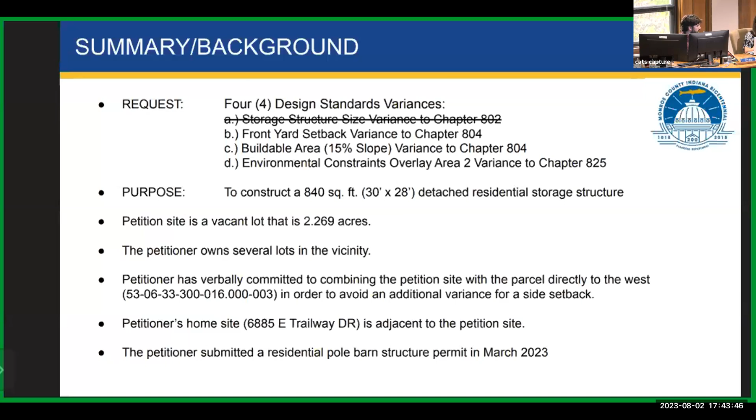This is also in the packet, in order to avoid an additional variance request for a side yard setback. When we get to the site plans from the petitioner, we will show you exactly what we mean by that, and show more detail about where the structure will actually be located.

The petitioner submitted a residential pole barn structure permit in March. After review of that and communications with staff, it was determined that the variances on the docket for tonight would be necessary.

This petition was heard at the June 7th, 2023 BZA meeting. The BZA voted to continue this petition based upon new information submitted by the petitioner during the meeting—that the petitioner was planning to reduce the structure's size.

Originally, we had another variance request within this petition about the storage structure size. There is a limit of 875 square feet in this zoning district for a storage structure placed on a property that does not have a principal use structure on it, sometimes referred to as a residence. Since this property is vacant, they would have needed that variance request. But they've reduced the size to 840 square feet, which simply removes that request.

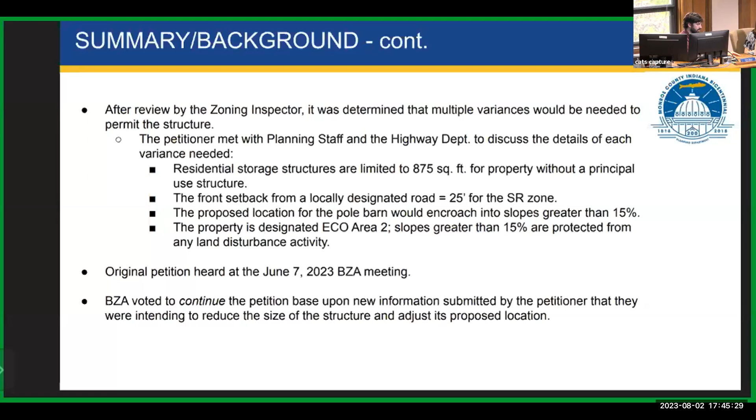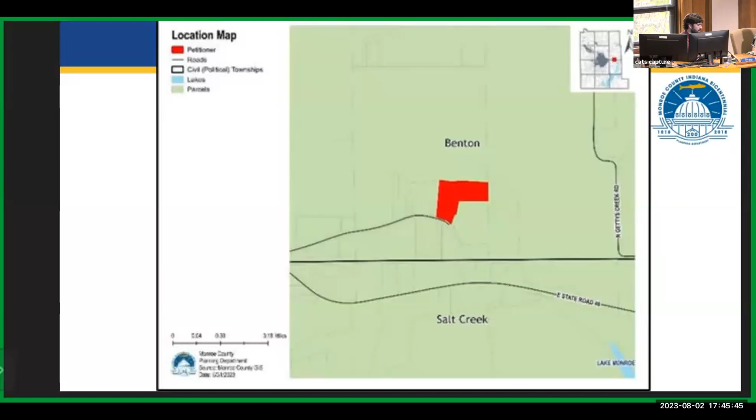Here we have the location map. It's on 6885 East Trailway Drive. That address is the petitioner's address. This subject parcel is two parcels to the east along East Trailway.

Here we have the site condition map. The green lettering shows the parcels I've just mentioned. The petitioner's parcel is on the left side of the screen, and the petition site is on the right side. There is a parcel in between, also owned by the petitioner, that they intend to combine in order to avoid a side yard setback.

As you'll note on this map, the buildable area—all the area not color coded in red—is very limited. All the areas in red are over 15% slope. So the petitioner has requested the front yard setback, as well as buildable area setback variances, in order to find a location that disturbs the least amount of land while still meeting their needs for the storage structure.

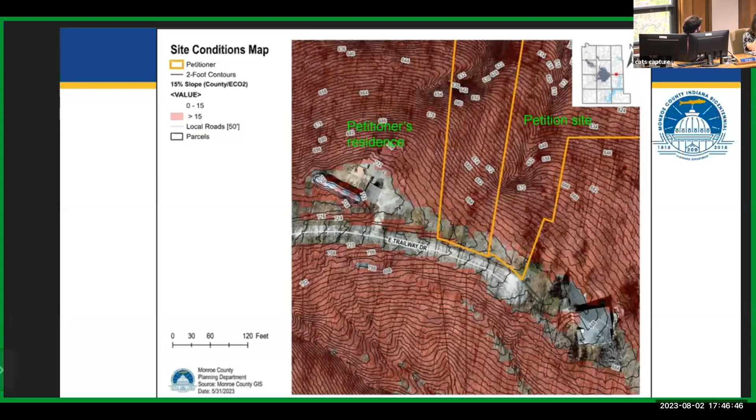And that one there is just aerial pictometry of the site. We'll come back to it if need be.

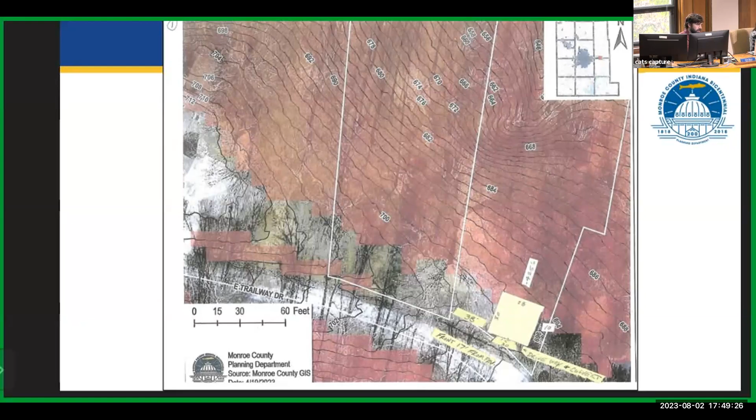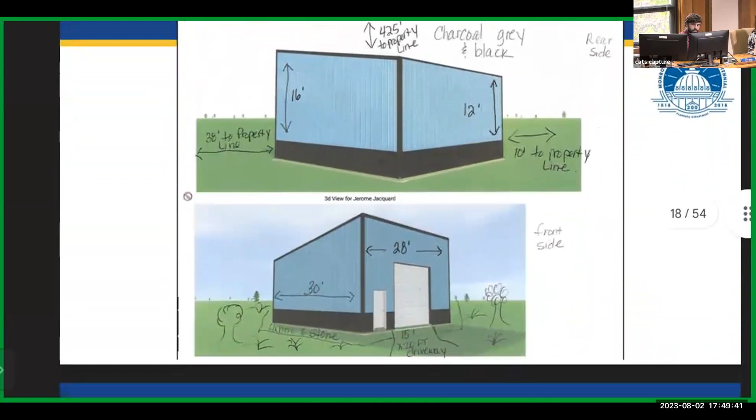Here is a diagram of the proposed structure submitted by the petitioner, along with some measurements, and an additional page of writing from the petitioner that was included with that drawing. This is all included in the packet, so it's probably easiest to see it there.

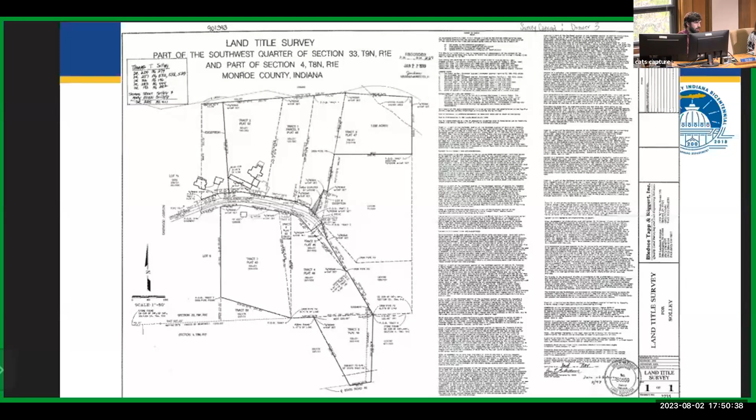Here is a survey of the area that was submitted to staff. It provides information regarding East Trailway Drive in this area, as well as a number of covenants and restrictions for lots in this area. Planning staff does not enforce covenants and restrictions from subdivision plats—those are enforced by an HOA or through civil suit by property owners. So although there may be some constraints outlined in those covenants and restrictions, the zoning ordinance does not have authority over them.

And this is just a zoomed in version of that, to get a better idea of the sites we're talking about.

And here are some images of those covenants and restrictions I spoke of. We can come back to review those if needed.

And here we have some pictures submitted by the petitioner of the location of the driveway they want to install for this structure.

We do have one letter of support that was submitted. We had this at the last meeting. I don't believe it was included in the packet because it came in a little late, but it was in the PowerPoint—so we do have at least one letter of support. It was included in the packet, so we can come back to it if needed.

We also have some letters of opposition, primarily from one individual, the property owner to the south, who submitted a letter of opposition and also retained the assistance of the Carmen Parker law firm to produce a letter of opposition, as well as Abram Moss to produce a letter of opposition with respect to the site's physical constraints. That's also included in the PowerPoint and the packet.

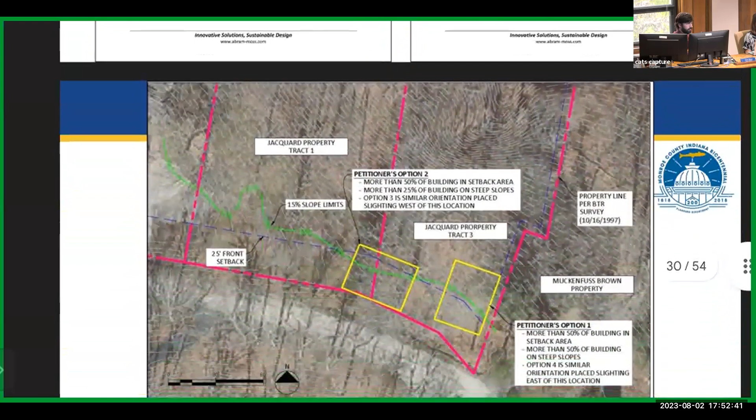This image here was included in the original letter of opposition from Abram-Moss. However, the storage structure size has been reduced, so this item is not completely accurate, although the outlining of the parcel lines and the slope area does remain.

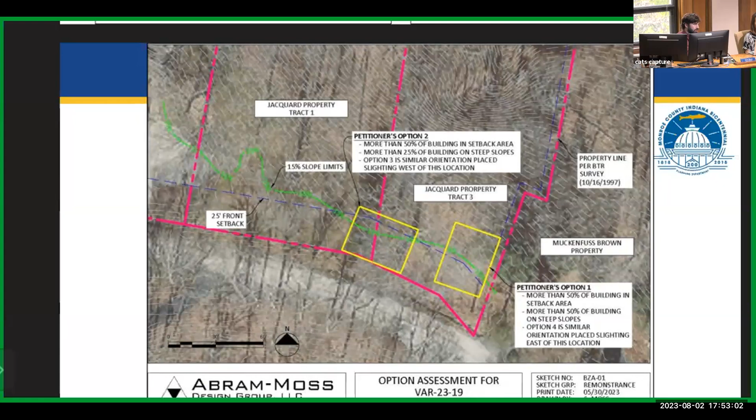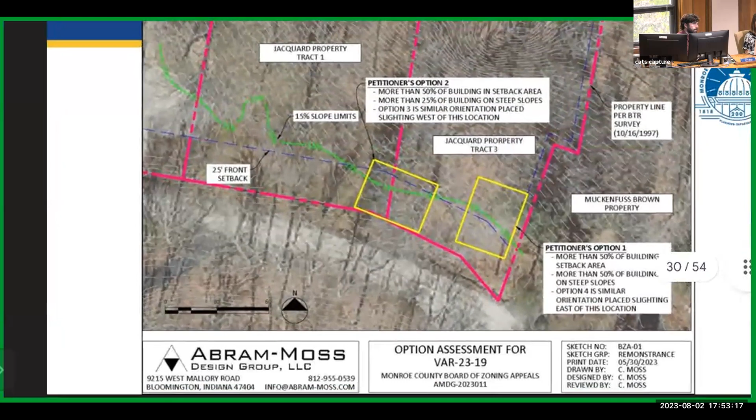Could we go back to that last one? Is the green line the 15% slope? I think so, because it doesn't have it in red. So it's a change in presentation. I want to make sure I understand it. And that's the green line. Thank you, yes, just wanted to make sure.

Those yellow rectangles were some proposed locations for the storage structure at the last variance hearing. However, it's reduced in size, so those yellow rectangles are not representative of what's being requested today. But what is being requested today still...

...goes above the green line. Yes, it does still encroach slightly into the 15% area. Thank you.

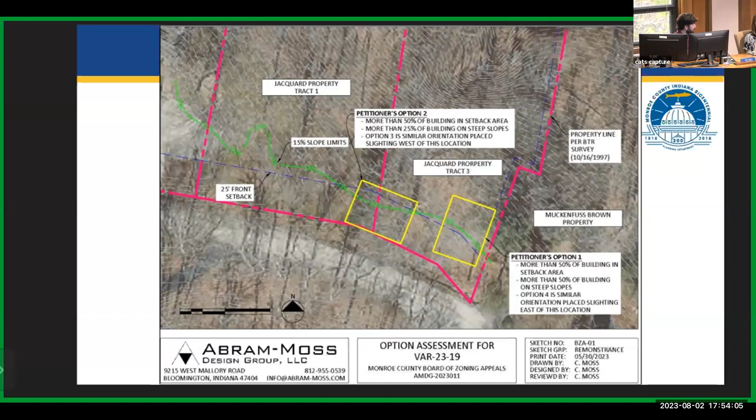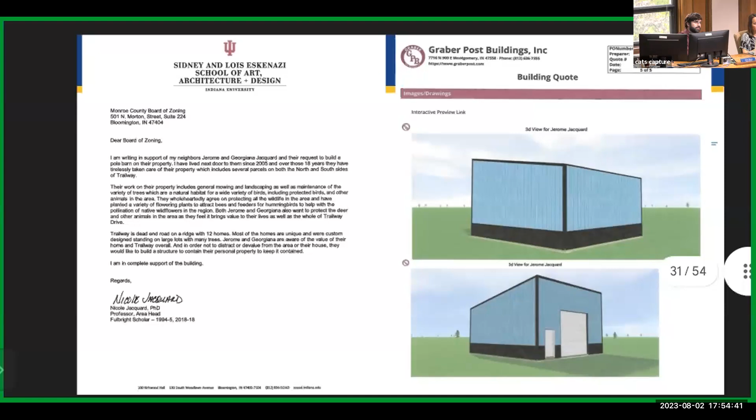Okay, so that brings us to the staff's recommendation. As stated, the first variance, VAR 2319A, was withdrawn because it is no longer applicable. The petitioner has reduced the storage structure size to meet the requirement of 875 square feet.

VAR 23-19B, the front yard setback variance, chapter 804, staff does recommend approval of that variance request with one condition: that a surveyor stake the front property line so that staff can confirm that the location of the structure will indeed be on the property and not encroach into right of way or anything like that.

And then VAR 2319C and D, which are the buildable area, 15% slopes, chapter 804, and the eco area 2, chapter 825, staff recommends denial of both of those items, primarily citing practical difficulties are not met in that the structure could be further reduced to eliminate the buildable area encroachment. I'll now take any questions.

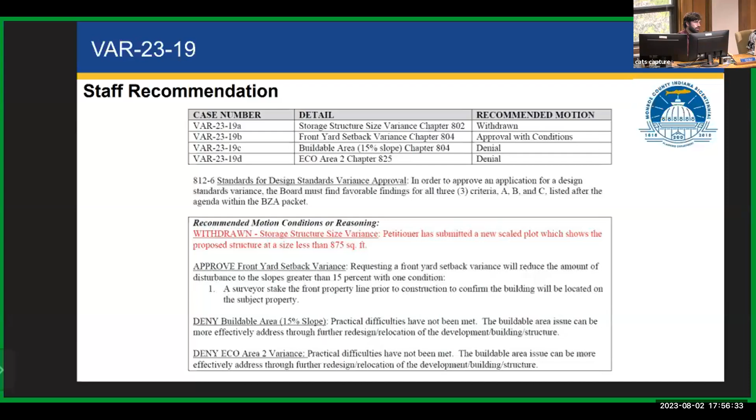That's a good question. I did not perform an analysis to see what the exact square footage would be needed. If we go back to the petitioner's site plan, you can see that it just slightly encroaches. It's a few slides up. Thank you.

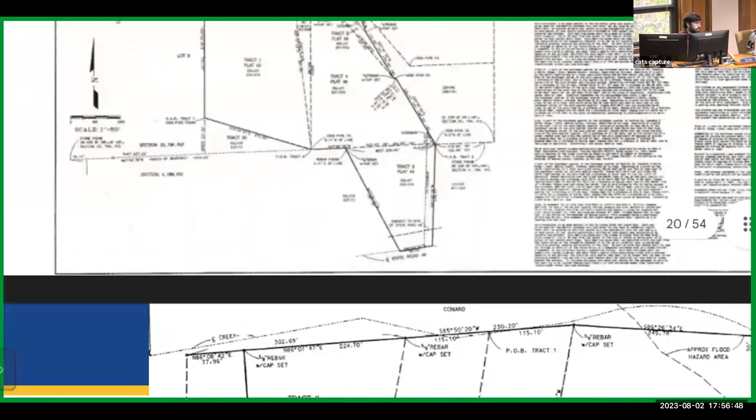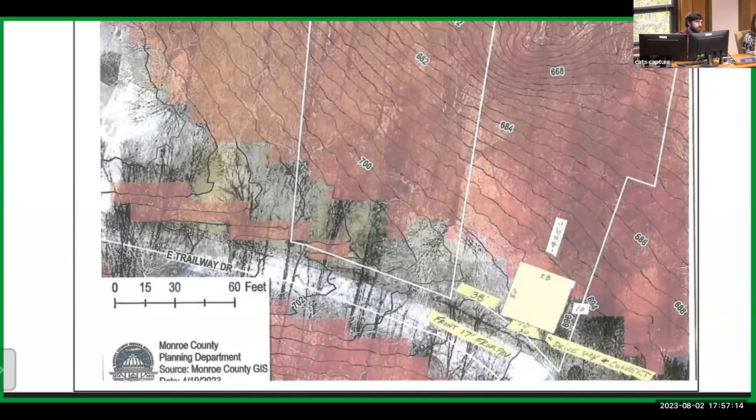Right there, so you can see the rectangle in the bottom right-hand corner. There's still a sizable area that would encroach into the slopes. And with that, the petitioner certainly has their reasoning for a certain size of the structure. It's just with the strict application of the zoning ordinance, theoretically, a structure could be reduced in size and meet buildable area in the area.

Okay, yeah, it could be, but it would be reduced so small that it wouldn't be worthwhile. I also note that in the letter from the attorney of the person who is against it, it points out that the warranty deed says there's no such thing as, they're not allowed to have storage facilities according to the deed. But it's got a garage door and a service door, so that means it's a garage. That's not a storage facility. So I don't know if we're calling it a storage facility, but it's actually just a garage, as far as I can tell. And it looks like they've tried to design it such that it fits exactly with the design of the house and the area.

So understanding that, you have to tell us that there's a 15% slope problem in the ECO 2 area.

It's not an egregious issue in my book, but I'll talk about that later. Thank you.

Any other? I would just... Can you hear me okay? Okay, yes. I'd just like to address two items.

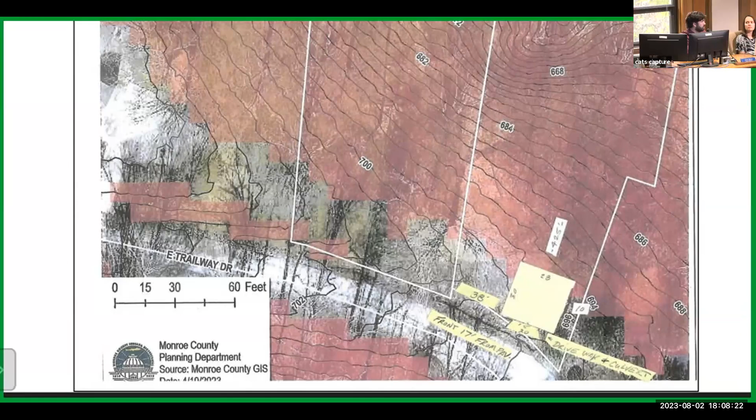My follow-up question: I see all the red behind that to the north. 15 degrees—it's 15 or more. Are we talking 15 to 18 degrees for that first 10 feet? Is that fair? Sean, will you scroll up to the slope map itself, which has the actual percentages listed? It just shows as greater than 15% here. Right, that's what I was saying earlier. To your recollection, after a site visit, this was not a 25 or 30 degree slope—it's fairly gradual. Okay, thanks, I'll say that.

Are there any other questions of staff from board members? No, not me.

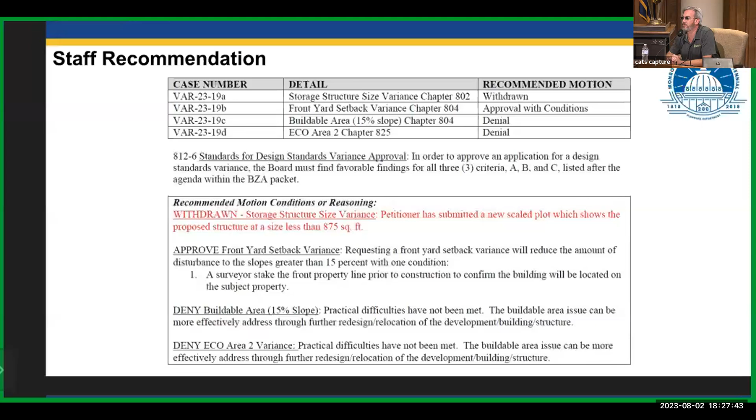Are there any other questions of staff at this time? Are there any other remonstrators who wish to speak that are inside the room? We're going to follow the same process—step forward, make sure the mic is there, sign yourself in, and we'll get you sworn in. Thanks.

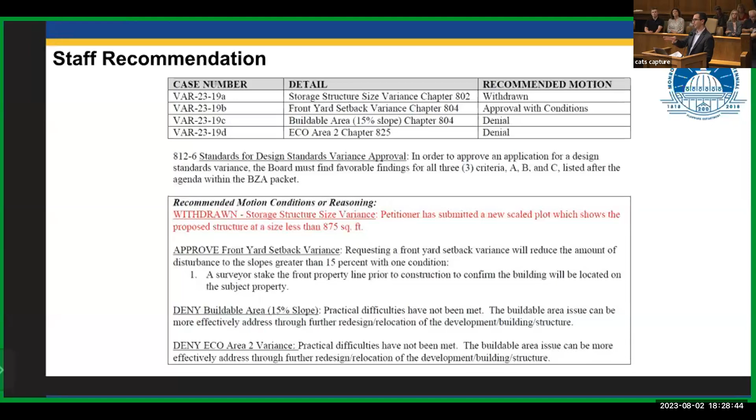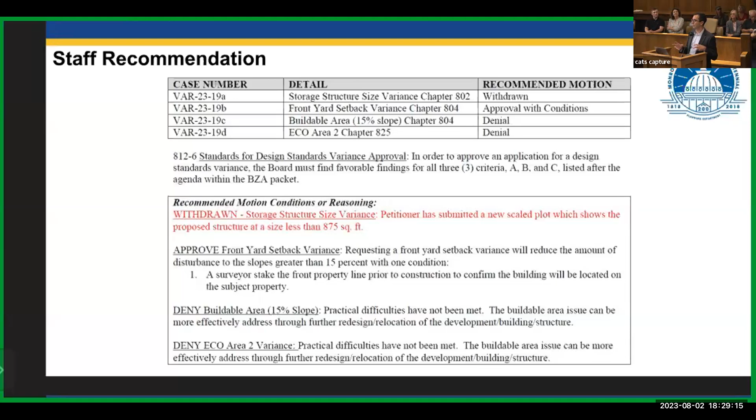For purposes of this, I just wanted to focus on the findings of fact, and for a design standards variance, this would be injurious to a natural area. It's obviously a steep slope, ECO 2 zone. If you could please turn to slide 11, that's one of the slides to look at, but I'll keep talking. This is a very small natural environment and the slope is very steep.

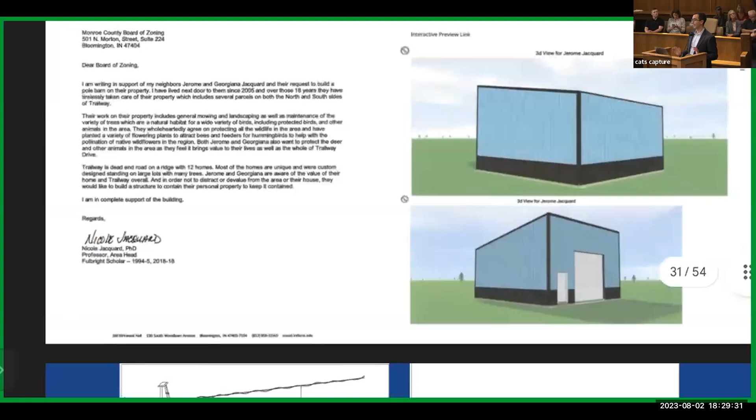There's been no showing as to why it has to go right next to my client's property. It's something the property owners have exchanged words about for years, like 'I'm going to put that thing right next to your driveway.' There's no reason for that type of dialogue, and no reason to put it right next to the driveway. They own 8 parcels and have 2 boats.

The practical difficulty cannot be met when you can put it in a storage facility where it is now. There's nothing impractical about storing a boat at a storage facility, and it would directly violate the restrictive covenants, which are totally outside of the BZA's jurisdiction. As a matter of precedent, it's probably a good idea not to grant variances that cause someone to build under or near a power line, or in violation of a restrictive covenant.

The diagram shows, as you correctly pointed out earlier, that the yellow boxes have changed in size, but essentially the point is the same: this is one of the narrowest parts. There's a plat, because there is a survey, that would show this private road actually has size to it that's beyond the visible roadway.

Could you zoom in toward the middle? My vision's bad, but you'll see there's a narrow triangle-shaped area on the east side of that lot. Actually, that's a disputed area. What we're talking about has already been shown in the public records to have a muddy property line. As far as putting it in a location that makes sense, that's probably not the best place, given it's a known encroachment.

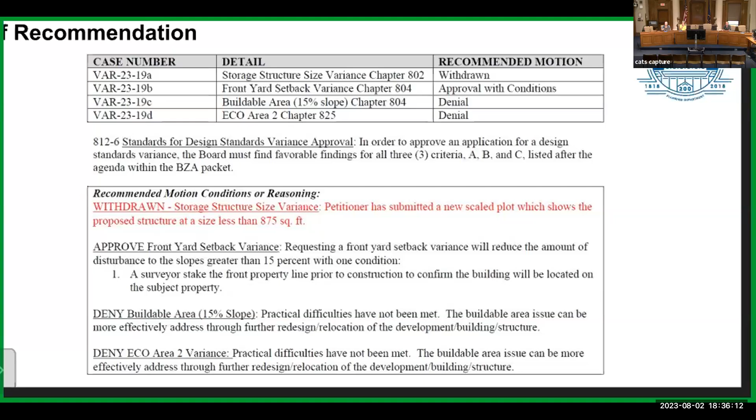I did have an opportunity to call Duke, and I believe they had faxed me a diagram—sorry, could I put you on brief hold? Could we put 5 minutes on the clock, please? Thank you. I did have an opportunity to get a hold of Duke, and they did fax me a diagram, which I believe I had uploaded, stating the requirements of the electrical line, overhead electric.

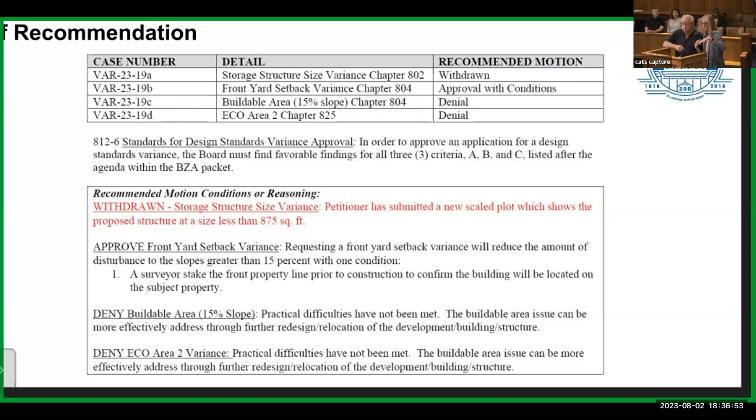So we are building behind—the road is here, the lines are here, we're building behind that. It's not going to be under it. We're meeting the requirements of Duke according to what they sent us. So we did reach out to them.

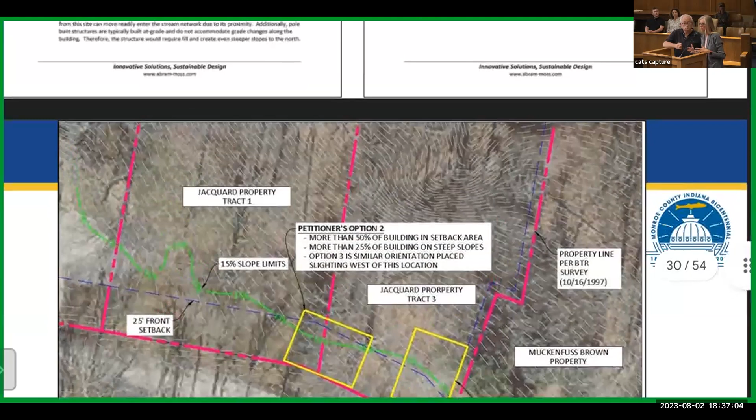Also, I totally agree with Polly regarding the animals on the property. They are stunning, they're beautiful, we've had tons of pictures of them. We are also members of the National Wildlife Federation, so we do not want to disrupt the paths that they walk or the beauty that they represent. That is why we're also trying to make sure that the ground stays as it should and everything flows as it should.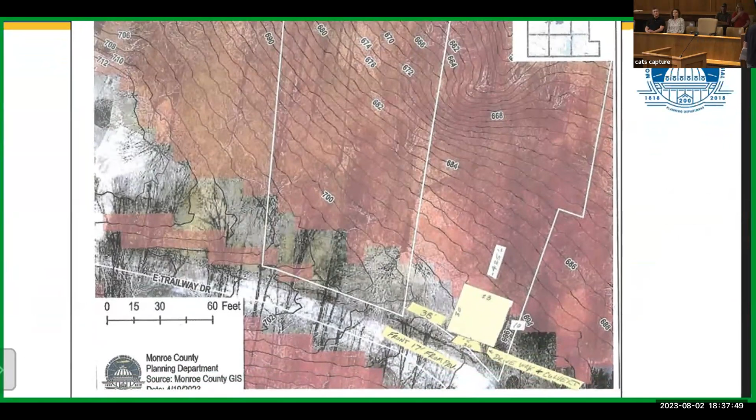That's well said, that's fine. Did you have anything to add? No. Thank you. All right, thank you. Testimony has concluded.

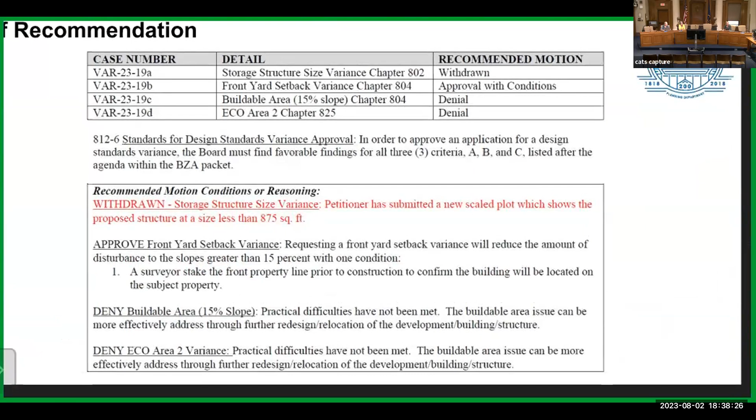Can you hear me okay? I don't think your mic's on. Yeah, I could hear, thank you. You could, okay. Huh, yeah.

The utility easements are not considered buildable area. So if there is a direct conflict of an easement with the location of the accessory structure, then they would have to come back for an additional variance and also work with the utility company to request this. But if they're stating that they're not in an easement, we do rely on property owners to understand their own easements and their own property lines. One of the conditions, if granted for the front setback, is that we are asking that they work with a land surveyor that could help stake out those easements and front property lines as well.

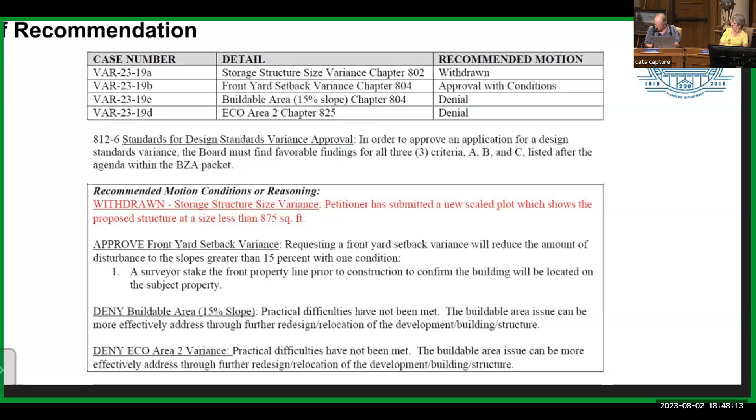I'm going to move that we deny 23-19C and 19D, the 15% slope variance and the environmental constraint overlay area 2, with respect to the 2.269 acre parcel in Benton South, located at 6885 East Trailway Drive. There is a motion on the table. Is there a second? Not hearing a second, is there anybody else that wishes to provide a motion?

Yeah, I can make a motion. I'd like to make a motion on variance 23-19B, front yard setback variance from chapter 804, to approve the front yard setback with the condition as stated by our planners that a surveyor stakes the property line prior to construction, to confirm the building will be located on the subject property. I'll make that one independently and not go to the other two yet.

All right, we have a motion. Is there a second? I'll second that. Staff, could you take roll please? It's been moved and seconded to approve VAR 23-19B, which is the front yard setback to chapter 804. A vote in favor is a vote to approve only the front yard setback.

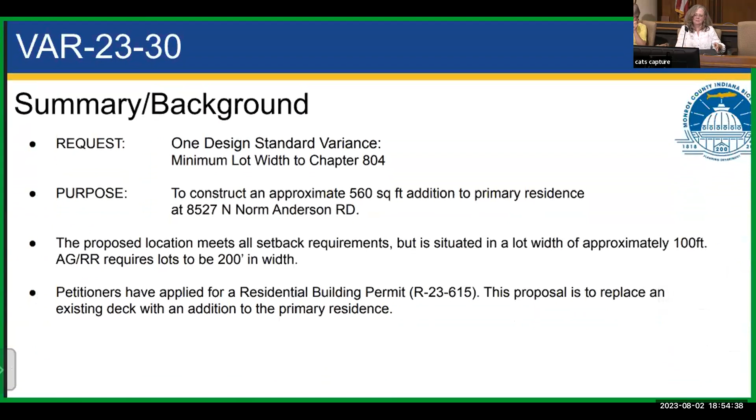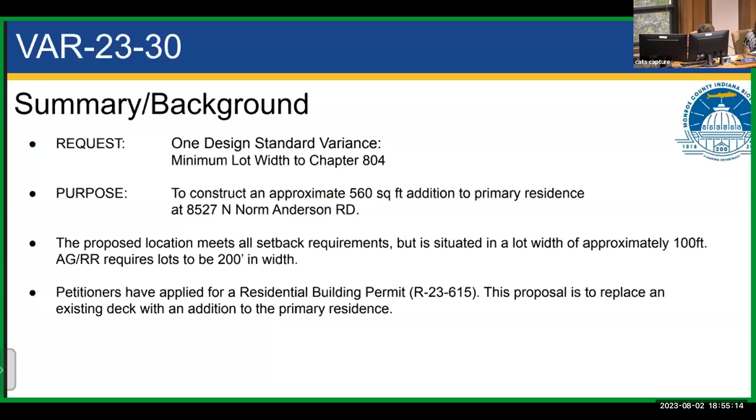So the request is one design standard variance, minimum lot width, to chapter 804. The purpose is to construct an approximate 560 square foot addition to the primary residence at 8527 North Norm Anderson Road. The proposed location meets all setback requirements, but it is situated on a lot width of approximately 100 feet. In this zone, Ag RR, it requires lots to be 200 feet in width. The petitioners have applied for a residential building permit, R-23-615. The proposal is to replace an existing deck with an addition to the primary residence. These are just some site conditions map and location map.

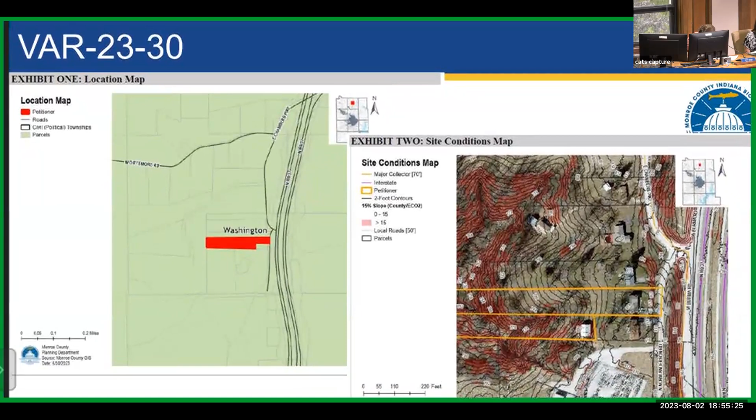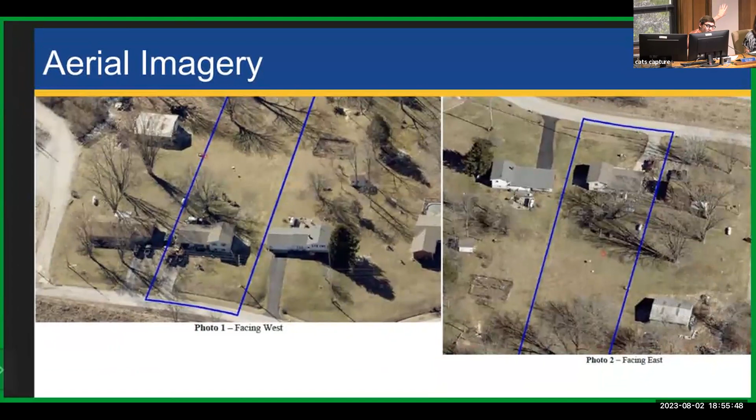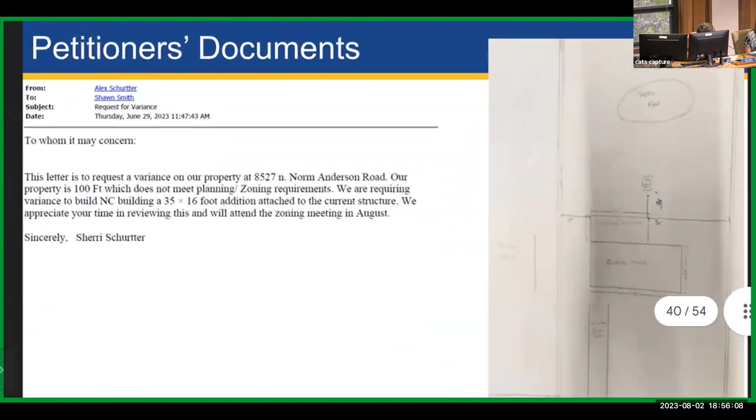For this petition, staff does recommend approval of the minimum lot width variance. Practical difficulties have been demonstrated. The location of the existing residence does not meet design standards of the Ag RR zone. A lot line shift is not possible as there does not exist at least 200 feet on either side of the residence without encroaching into neighboring residential homes. Therefore, no additions to the home can be made without variance approval or seeking a rezone to a zone with a smaller lot width requirement.

Thank you, that was a very good and succinct presentation. Do members of the BZA have questions for staff? I don't think so. So if the petitioner's representative is here and would like to address us, please come to the podium.

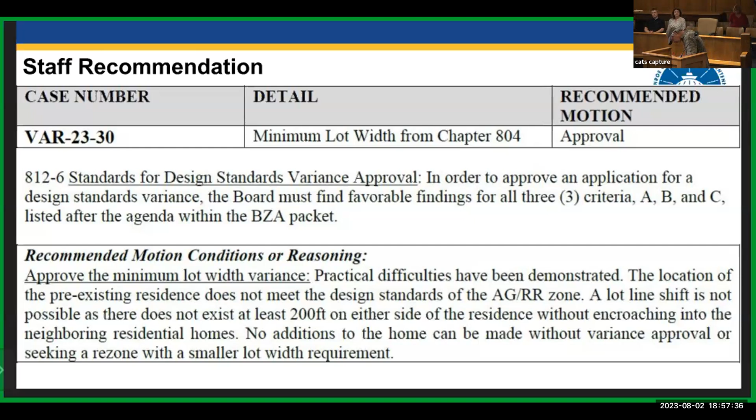Please come to the podium and sign in. If you would kindly sign in, I'll swear you in, and then you'll have up to 15 minutes to tell us what you want to do. Okay, would you please state your name? Bob Schurtter. Mr. Schurtter, would you please raise your right hand and swear to tell the truth, the whole truth and nothing but the truth? Yes. Okay, thank you. So tell us what you want to do.

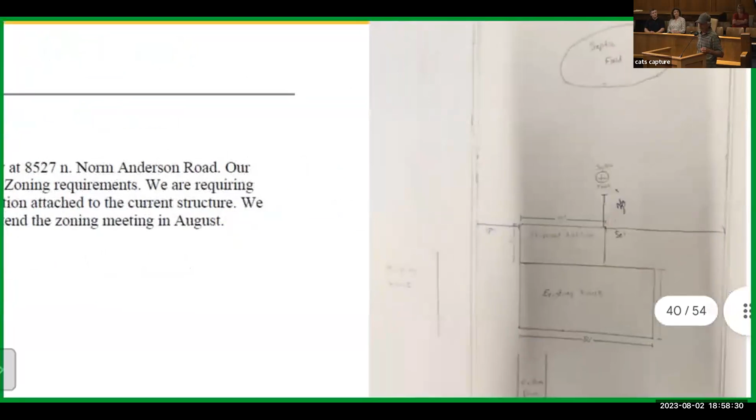Just as I said, take off the back deck and add on to the back to move our kitchen to the back and a family area. Sounds nice. Does anybody have questions for Mr. Schurtter? What are you thinking of adding on instead of the deck? What will it be in terms of rooms and space? Can you tell us a little more? A kitchen area, basically one big room, and a small room to move our laundry area from the basement upstairs, so we don't have all the steps.

And the septic field is located in the back of the property, isn't it? I saw that on the drawing, correct? Okay, fine, thank you. Sounds good. Do you have any questions? Okay, well, we'll hear from the public. And if anybody complains about what you're asking to do, you'll have a chance to come back. Okay, thank you.

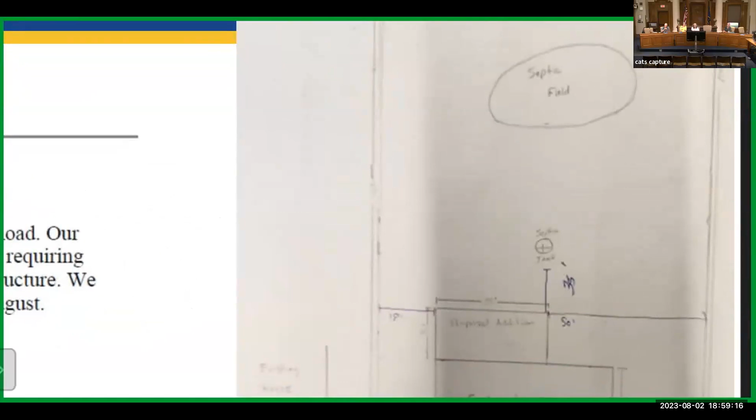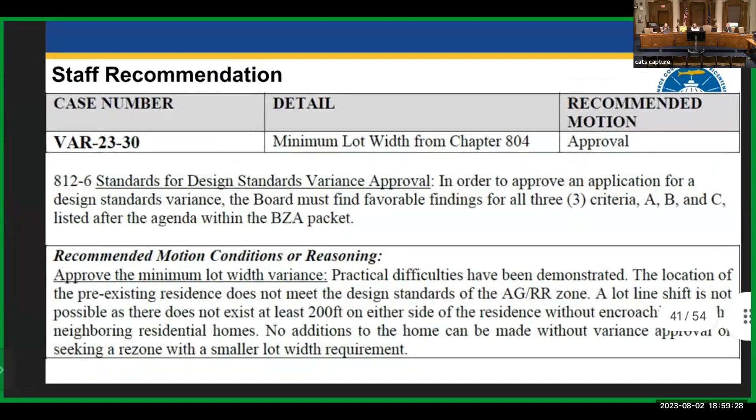Are there members of the public who would like to speak in favor of this petition? If so, please come to the podium, raise your virtual hand on Zoom, or press star 9 on the telephone if you're dialing in by phone. And if we don't see anybody, are there members of the public who are in opposition to this petition? Please come to the podium, raise your virtual hand on Zoom, or press star 9. Do you see anybody? Unfortunately, I can't see the Zoom, so you'll have to rely on the screen or tech services to confirm. No, I don't see anybody. I only see 4 people online and nobody's raising their hand. Correct, and 3 of the people are kind of internal to us.

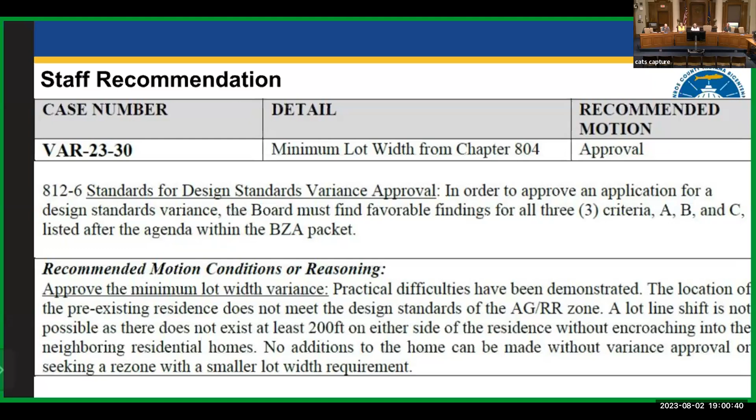Coming back to members of the Board of Zoning Appeals, we can either discuss this or have a motion. I'd like to make a motion that we approve variance 23-30, minimum lot width from chapter 804. Is there a second? It's been moved and seconded to approve the Schurtter minimum lot width variance to chapter 804. A vote in favor is a vote to approve. Guy Loftman, yes. D Owens, yes. Pamela Davidson, yes. Margaret Clemens, yes. Skip Daily, yes. Motion carries 5-0.

Have a very nice time redoing your home. Thank you. Thank you very much.

We're moving on to the last item on the agenda. This is VAR 23-31, Hunkler, buildable area over a 15% slope, a variance to chapter 804. This concerns a 2.7 plus or minus acre parcel in Clear Creek Township, section 06, at 2125 West Dowden Road. Mr. Myers, if you would review that case with us, we'd be so grateful.

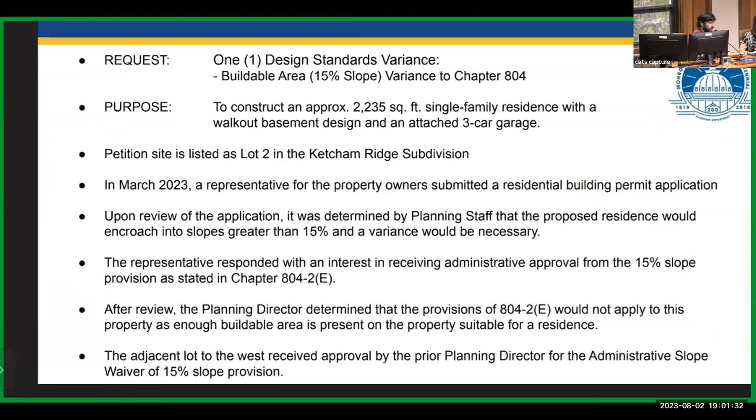Yes, and I would like to offer a correction. There was a typo, it's Dowden Creek Road. I apologize for leaving the creek out, but it's Dowden Creek Road. That's very nice, that's even better. They have a creek. Okay.

So this is one design standards variance to the buildable area 15% slope, chapter 804. The purpose of this variance is to construct an approximate 2,235 square foot single family residence with a walkout basement design and an attached 3-car garage. There is some information in the staff report provided in the packet about the square footages of the proposed structure as well as the proposed site plan.

After that packet was published, the petitioner provided updated information about the size, design, and location. So in this presentation, I'll have some information that will be different than what is included in the packet.

The petitioner stated that the square footage would be approximately 2,200 to 2,400. Most specifically at this time, they're thinking about building a 2,235 square foot single family residence. The petition site is listed as lot 2 of the Ketcham Ridge subdivision.

In March 2023, a representative for the property owners submitted a residential building permit application. Upon review, staff determined that the proposed residence would encroach into slopes greater than 15%, and a variance would be necessary. The representative responded with an interest in receiving administrative approval for the 15% slope provision stated in chapter 804-2E. Those provisions are included in the staff packet.

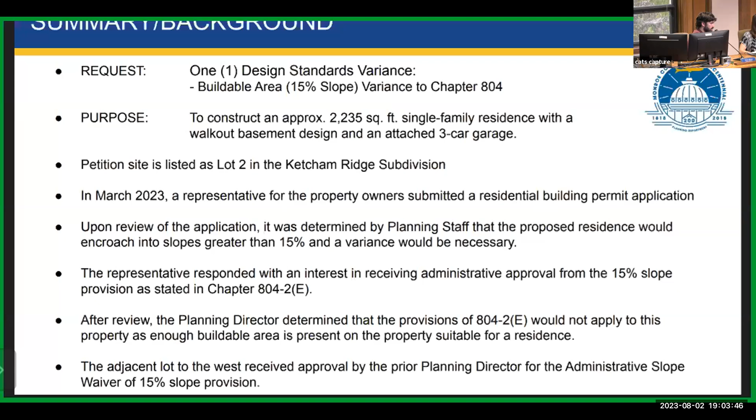After review, the planning director determined that the provisions of this administrative slope waiver would not apply to this property, as enough buildable area is present suitable for a residence. Staff will note that the adjacent lot to the west did receive approval of this administrative waiver by the prior planning director for that 15% slope provision.

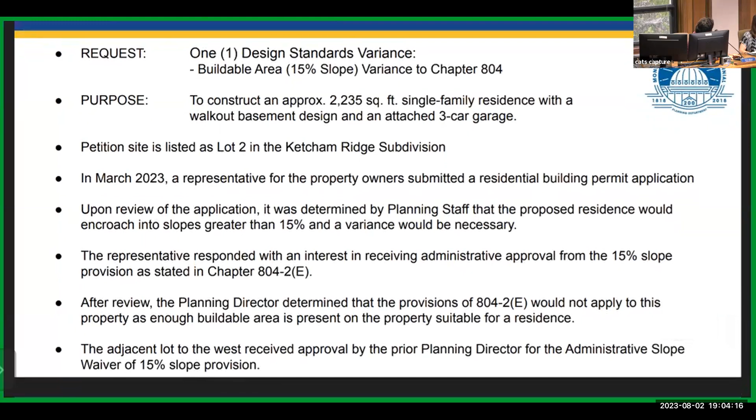Next slide. I included a slide here with the exact language of that slope waiver provision, so we can come back and reference it if necessary.

Here we have the slope map. West Dowden Creek Road is to the north of the petition site, which is where they would be receiving access. You'll note that the area not shaded in red is the buildable area.

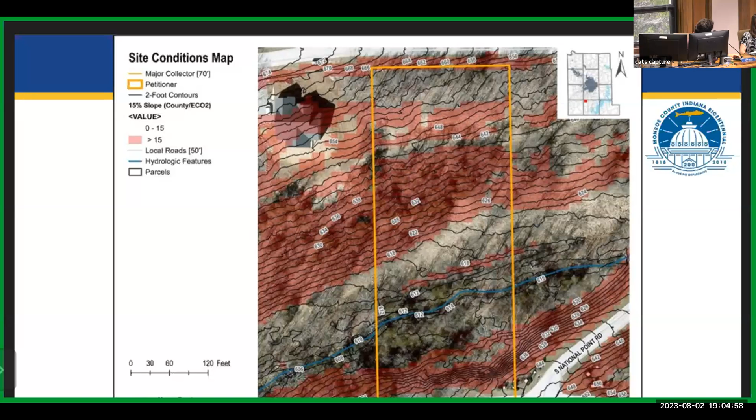There is a sliver of land just off of the front property line that is buildable. The property slopes downward as you go south, and towards the bottom of the property before you get to the other roadway, there is a water feature or hydrologic feature. Next slide.

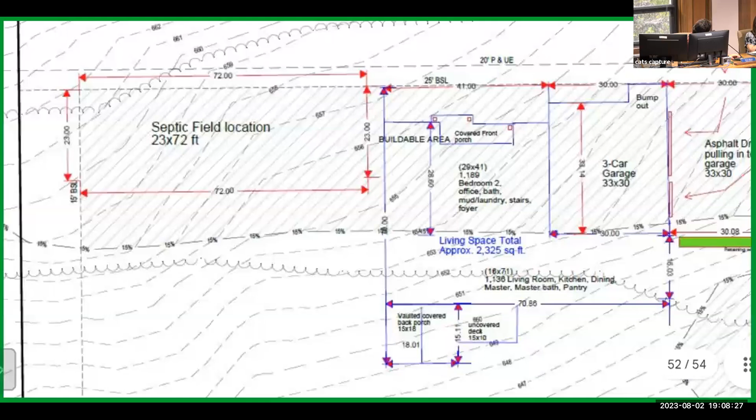And we can, of course, come back to this since it's the most up-to-date design for this petition.

That brings us to the staff recommendation. Staff recommends denial of the buildable area 15% slope variance under chapter 804, essentially stating that practical difficulties have not been met. The buildable area issue can be more effectively addressed through further redesign or relocation of the development, building, or structure. I will now take any questions.

Okay, do members of the Board of Zoning Appeals have questions for staff? I do. Ms. Owens, and then Mr. Loftman.

Initially it said the house and the garage are going to be over 6,000 square feet. This is two-thirds of that. I mean, it's considerably smaller.

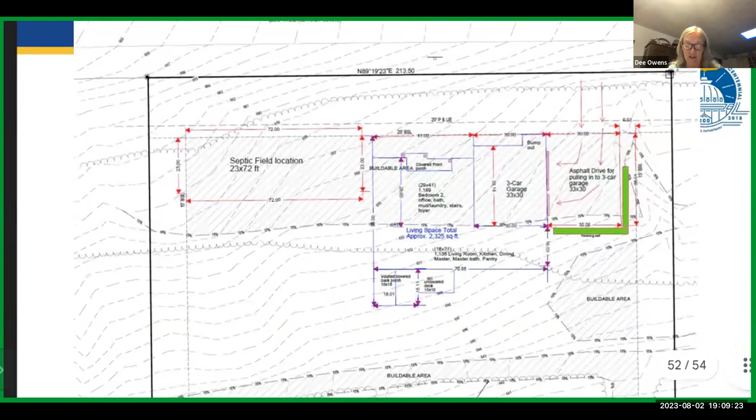And the septic, this newer picture also shows the septic field. So am I correct that a septic field cannot also be put in a 15% slope? That is correct. The health department does have a 15% slope provision for approved septic locations.

Okay, well then as far as the practical difficulties piece goes, if you have a driveway at almost to one edge of the property, you've got the 25-foot setback, and then you've got the septic field where it was approved, they don't have anywhere else to go except right where they're at. I don't understand where else you would have them go as a practical matter to build.

I think that's a question of asking where was your recommendation as to where 2,400 square feet could be built on this property? Yeah, so staff doesn't have a recommendation of where that size of a structure can go on the property. That's not our role to determine that. Our role is to apply the strict application of the zoning ordinance, which would say you can reduce the size of the residence and it still be a residence and meet the buildable area.

Absolutely, I understand that. I have a quick question as perhaps a follow-up to that. The adjacent neighbor apparently did receive at some point through a separate administrative approval, and I understand that's apples and oranges. But what is the construct of the neighborhood? Is 2,400 square feet livable? Is that in common support of what's going on in the rest of the neighborhood?

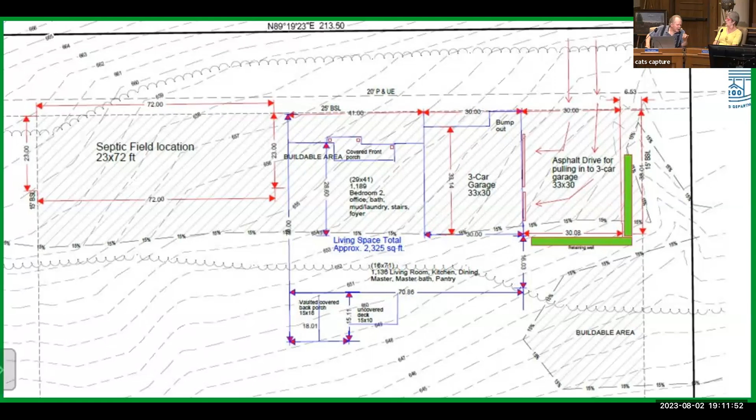Mr. Loftman: Yeah, I'm looking at this drawing and I don't see a nice blue line or anything showing me where the 15% slope is. There's sort of a wiggly line. There was a slide a few back that mentioned the creek.

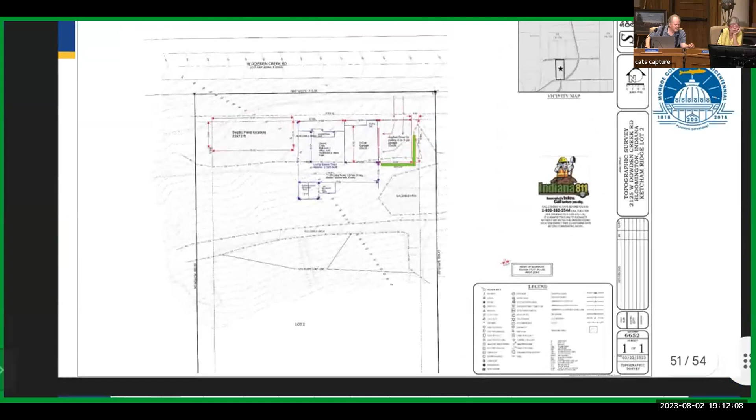If you scroll back to the one that's zoomed in, I can walk up to the screen here and point it out to you. It's a long walk.

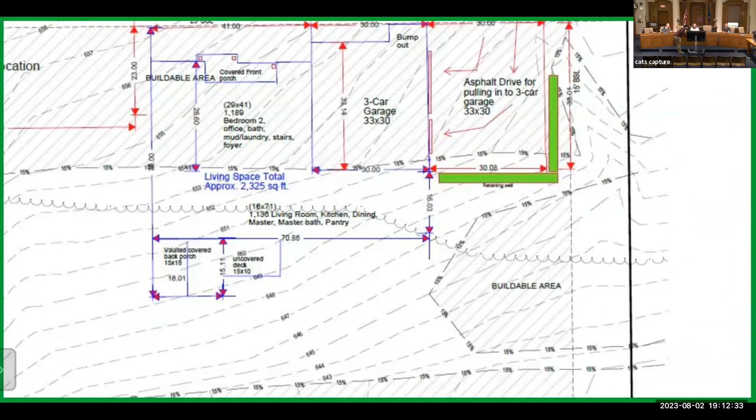Thank you. By the way, Mr. Myers, so this line here, 15%, this is buildable. And here's the line again, that's buildable. So everything that's hatched is buildable. And they're extending this direction south into over 15%.

All this is 16 to 18%, right? I mean, they're requesting the variance for the living room, which is in between 16 and 18% slope. And the vaulted back porch is in an 18% slope, and so is the uncovered deck. Is that correct? That's what I'm seeing.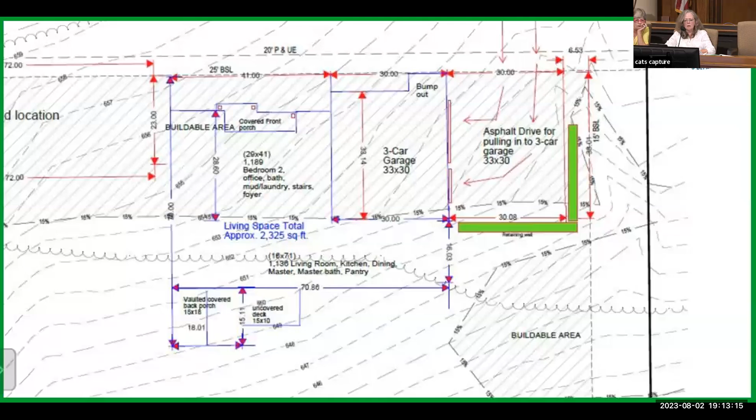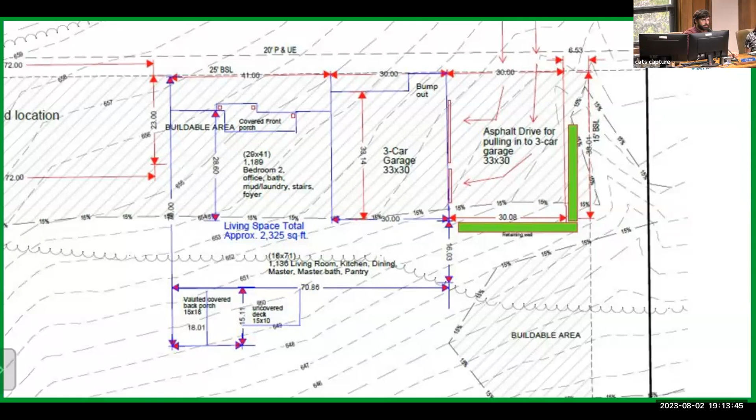I don't know if this map or drawing shows exactly the percentages of slope for those areas. Certainly we could. I think the numbers you're looking at are the dimensions of the addition. But under the vaulted covered back porch, 15 by 18, it says 18.01. Is that the slope? That is the distance, not the slope. I see, yeah, that's its dimension. Okay, looks like about 20 feet on one side and 16 feet on the other side are encroaching.

All right, okay, this is not an ecological conservation area, correct? No, this is not in the environmental constraints overlay area. It's just the chapter 804 countywide 15% slope. Thank you.

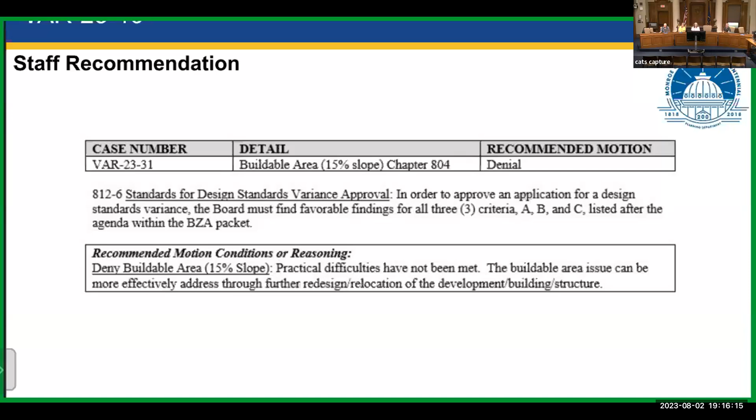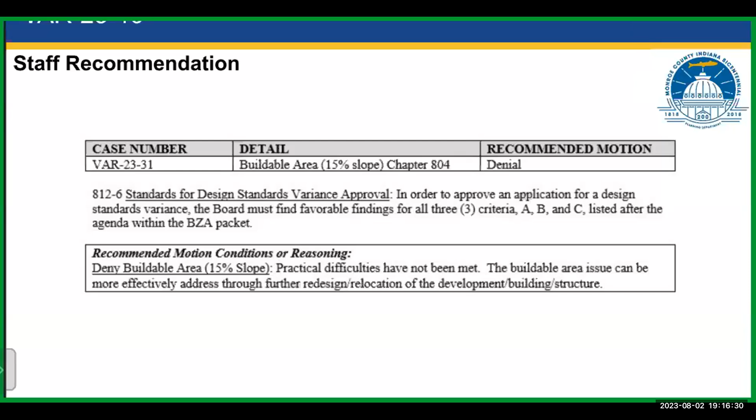Well, I guess as you can see with the evidence we sent in, this lot is very challenging. We've attempted probably 9 designs to try to fit it in a buildable area before we found out where the septic location was going to go. So when we found that out, we had to completely redo it again, realizing yes, we'll have to get a variance because it would go back further. We needed it to be deeper, since it was only leaving us about a 30-foot deep home, which was just not feasible for our forever home.

So with the original report, it had mentioned something about having 3,000 square feet to build, and we weren't quite sure where this 3,000 square feet is. Because with our calculations, we were only given like a 40 by 30-foot area in the middle between the septic, the garage, and the driveway area. So therefore that's why we were requesting approval to be able to go back deeper and then around the garage, behind the garage.

This lot is really beautiful, overlooking the creek area. So that's why we want to have a covered walkout porch on the back, and then an uncovered area for grilling and entertaining.

But I guess the question is, we've had really no recommendation or guidance on where we can build to fit within the 15 slope. It's just, we can't see it working to what we want to put in our house.

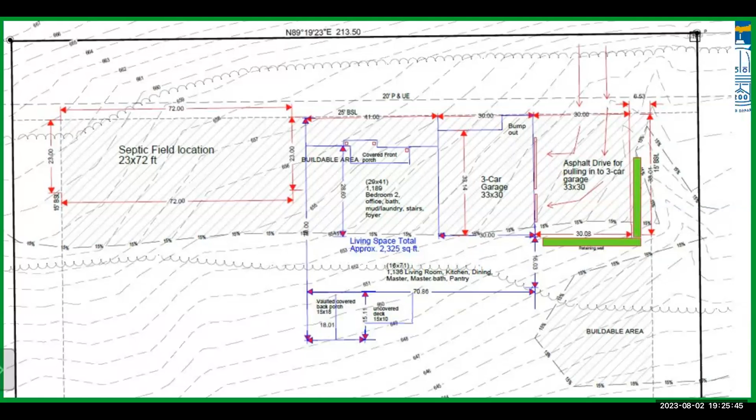Would you kindly raise your right hand and swear to tell the truth, the whole truth, and nothing but the truth? I do. Your name, sir? My name's Brian Moore. I am the developer of the subdivision, the original developer. I'm a registered professional engineer, and I came to speak in support of this fine family building here.

Just to pass along a couple of comments: the project has been a long one, probably 15 years ago when that was platted and we opened it up, and things were a little different then. But it's been a neighborhood that has grown kind of slow, filled out with wonderful people and wonderful homes. It's turned out better than and fulfilled my vision for what it was. That's my only development project in my history, and it's turned out real well, and we're happy with it.

I did want to pass along that after this lot, there's only 3 lots remaining. Basically everything else has filled out and been built out very nicely. As Katie spoke, the adjacent home has handled their lot in the back there well regarding any drainage or erosion issues you might imagine. It's very thick with wooded vegetation, and the whole subdivision is like that. It's very much park-like, so we're very much in support of it and would recommend approval.

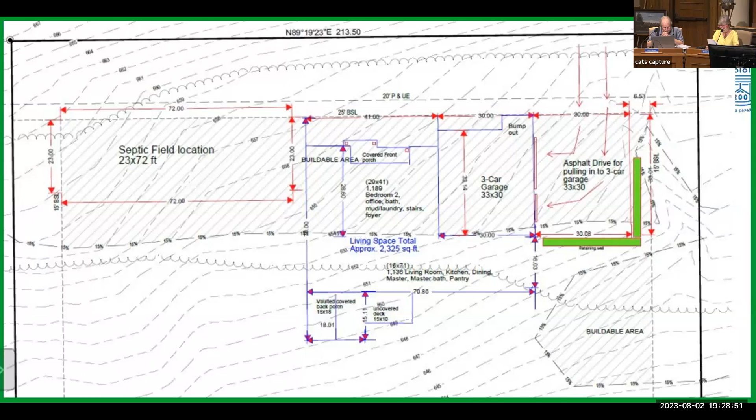I would like to move to approve Variance 23-31, the Hunkler buildable area 15% variance to Chapter 804, for property located on Dowden Creek Road. I'll second. It's been moved and seconded to approve.

Could I ask a question of both Ms. Davidson and Ms. Owens? Would you say that if this were approved, it would not be injurious to public health or to the community, which seems to be very in favor of this? Yes. And if this were approved, do you think it would adversely affect the property values of surrounding properties? I can't imagine that it would adversely affect property values of the surrounding locality.

Do you think they've demonstrated practical difficulties? The fact that we've heard they've gone through 9 different designs and worked very hard to accommodate the septic field—as Ms. Owens says, it's hard to imagine where else it could be located, given how much effort they've put into this design to fit the covenant of a 2,000 square foot minimum and the attached garage. Do you agree with all those things in your motion, both Pamela and Dee?

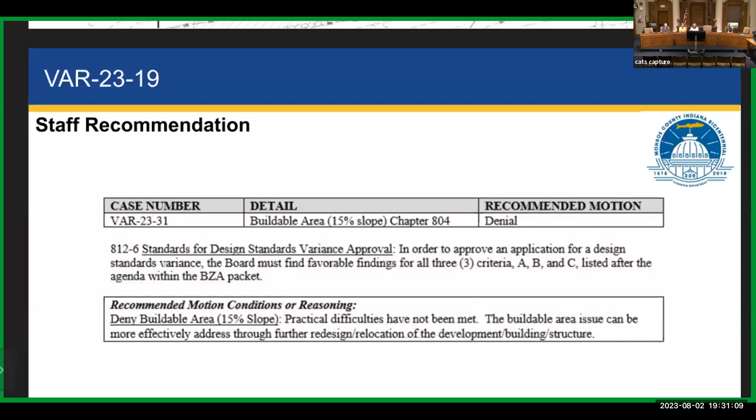Thank you, the Hunkler family, and thank you for coming here today and for all the work you went through to make a nice home. Thanks for everybody supporting this too.

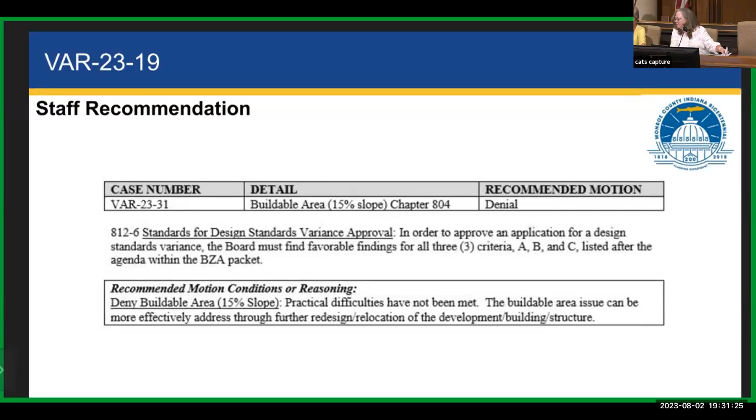Go from here. So we can build past the slope. Wouldn't you know?